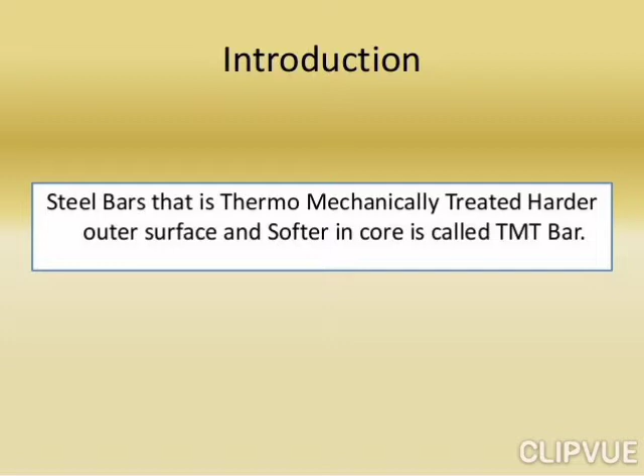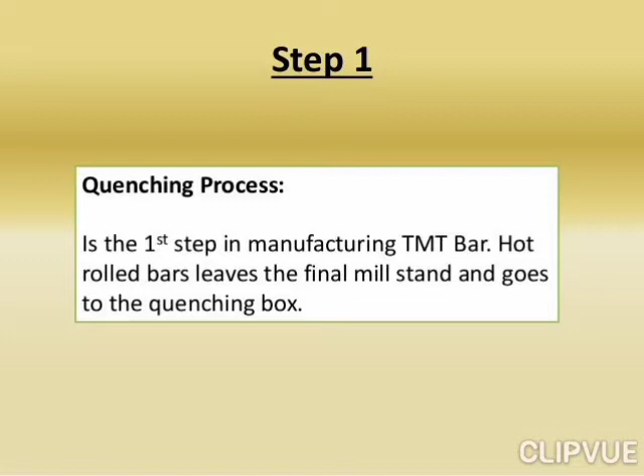First step comes the quenching process. It is the first step in manufacturing of the TMT bars. Here, the hot rolled bars leave the final mill stand and as a result go to the quenching box.

Next step is the tempered martensite. In this stage, the bar leaves the quenching box and the inner core continuously supplies heat to the outer core and helps to create the structure.

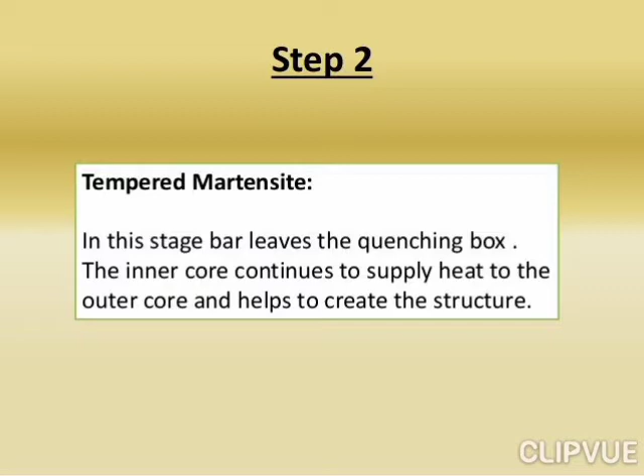Next step is the atmospheric cooling. It's the third and final stage in which bars reach the cooling beds. In this stage, bars reach their final structure with a harder outer base and softer core, ductile enough to be used for all construction purposes.

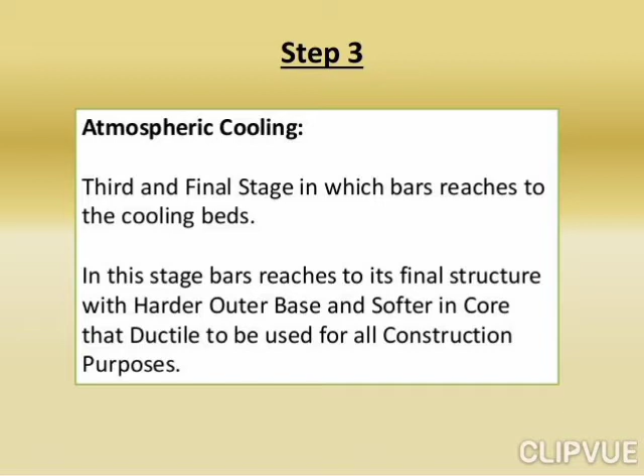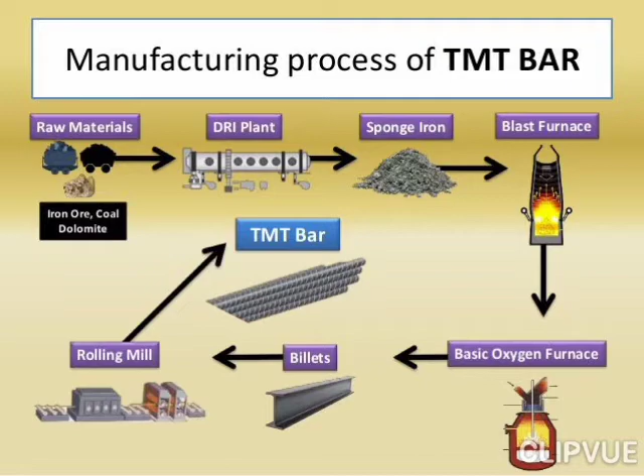Now comes the manufacturing of the TMT bars. Here is a flow diagram of the manufacturing process. The raw materials first go to the DRI plant and from there the sponge iron is collected and sent to the blast furnace. Oxygen is supplied and the billets are formed. From there the mills are rolled and finally the TMT bars are formed.

As we know, Shyam Steel is one of the most iconic and leading companies that do business with TMT bars. They manufacture the TMT bars. Its advantages are consistent quality along with uniform grades, and these also have superior stability. The properties give higher durability and workability is made very easy.

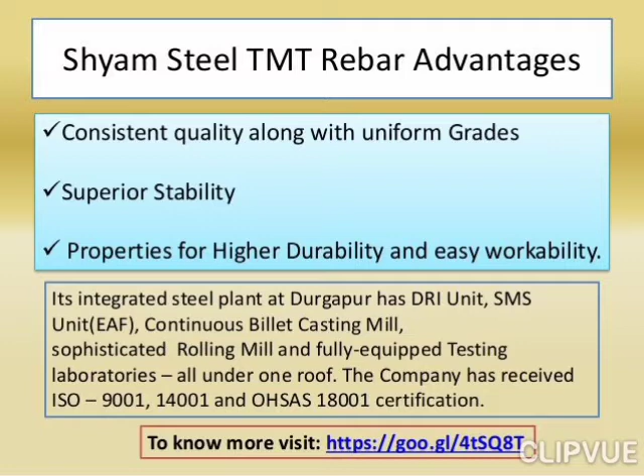Now comes the strength and ductility of the TMT bars. What is the strength and ductility of the TMT bars? Strength and ductility are the two most important features in the TMT bar. For strength and ductility, any building or structure's load bearing capacity increases and the longevity of the building increases.

The strength of the TMT bars is equal to the amount of stress the materials can take before they fail or fatigue. And the ductility of the TMT bars is equal to how much the TMT bars can bend, up to its optimum tensile strength, without losing its strength or becoming brittle.

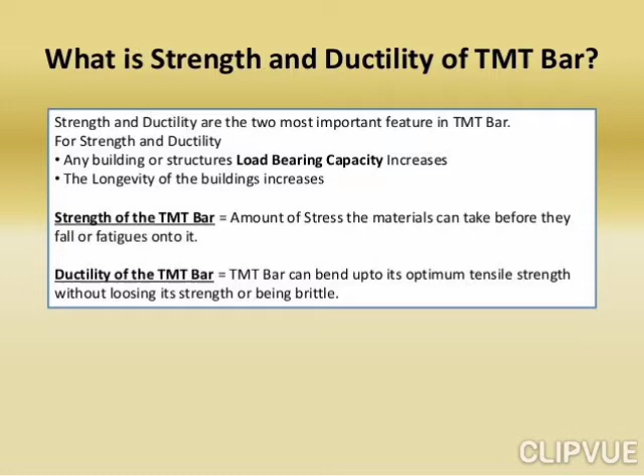During the manufacturing process of thermomechanical treatment, in the atmospheric cooling stage, the TMT bars actually become a ferrite pearlite structure. This structure is nothing but soft in the inner core and strong from outside. The TMT bar is one of the main components of RCC structures. If the TMT bars are not strong enough, the structure will not be able to sustain. Thus, it needs to be strong enough to take the load bearing capacity.

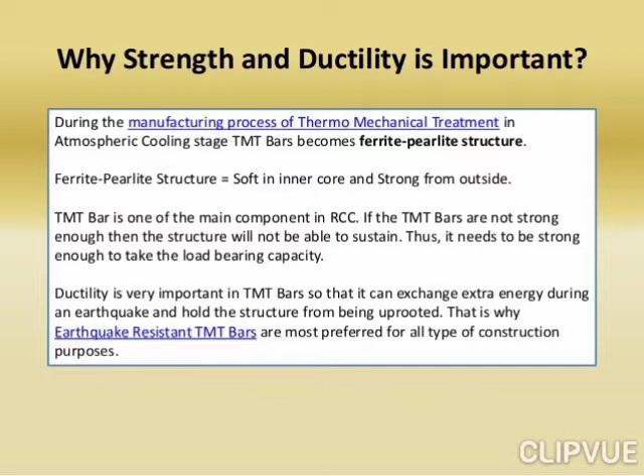Ductility is very important in TMT bars so that they can exchange extra energy during an earthquake and hold the structure from being uprooted. That is why earthquake resistant TMT bars are most preferred for all types of construction purposes.

What is the yield strength in TMT bars? Yield stress, in Newton per mm square, is different for each grade. As per IS 1786-2008, FE 500D comes with the maximum yield strength. For FE 500D, the yield strength is 500.

Yield strength or yield stress is the maximum optimum level of stress at which the material starts to deform. The yield point is where the deformation actually starts. If the material crosses the yield point, some of the fractional damage to the material will be permanent and irreversible. So in the given table, we can see the yield strength in different grades of TMT bars.

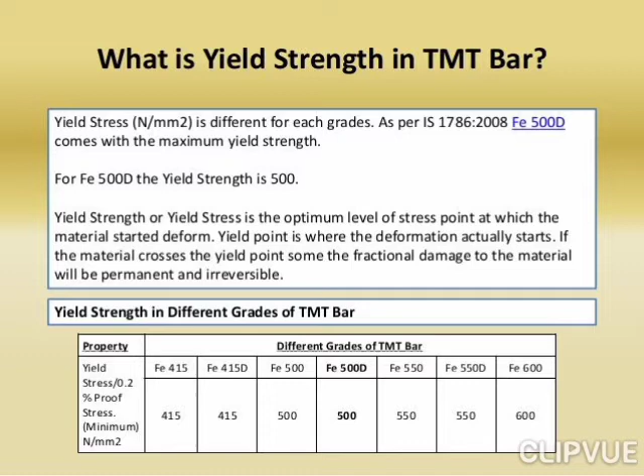What is actually ductility in TMT bars? Ductility means the ability of the material to easily deform and adapt as it is put under stress with tensile load within a construction unit. Ductility of the TMT bar mainly depends on the elongation, how much elasticity the material has from its original length to the point of collapse.

Ductility is the ability of the TMT bar to be elongated without losing its strength. Ductility in TMT bar is more important because it determines how much it can bend as per the construction requirement. Therefore, elongation is one of the most important factors before you choose to buy a particular TMT bar.

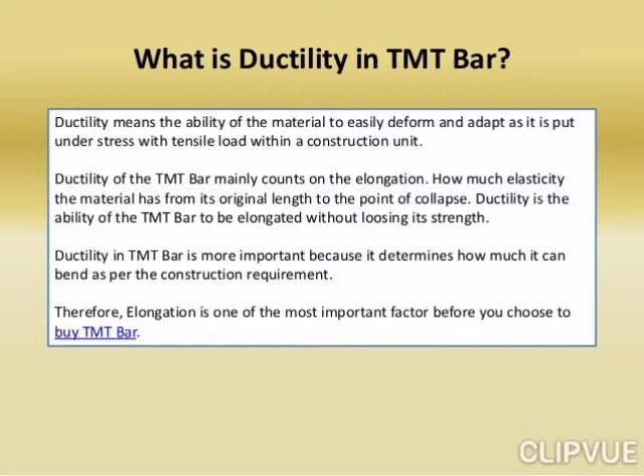So what would be the final decision to make before buying a particular TMT bar? The TMT bar should have enough strength so that it can take the load bearing pressure, plus the TMT bar should be ductile so that it can be used for all construction purposes without being brittle. Then how to take the final decision before we buy a particular TMT bar? We should check the below mentioned points before taking the final decision for buying the TMT bars.

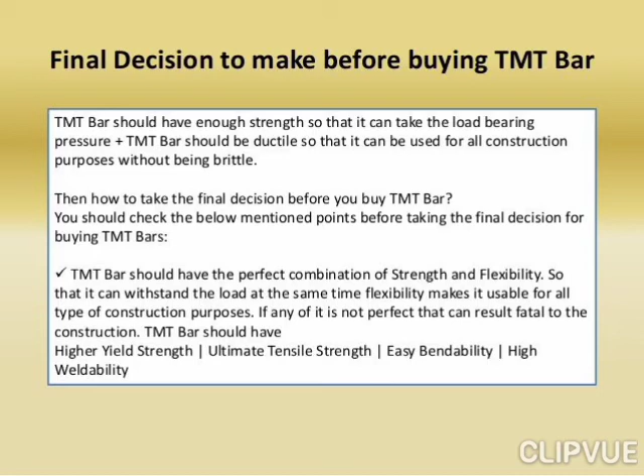The TMT bar should have the perfect combination of strength and flexibility so that it can withstand the load, while at the same time flexibility makes it usable for all types of construction purposes. If either is not perfect, that can result fatal to the construction. The TMT bar should have higher yield strength, ultimate tensile strength, easy bendability, and high weldability.

As per IS Indian Standards 1786-2008, FE 500D grade TMT bar has the perfect combination of strength and flexibility. That is why it is widely used for all construction purposes.

Shyam Steel's FlexiStrong TMT bar is associated with India's largest projects. The TMT bar is the most important construction material for our home that determines the longevity of the structure. So before buying a particular TMT bar, we need to ensure and check all the facts and not compromise with the quality. Thank you.